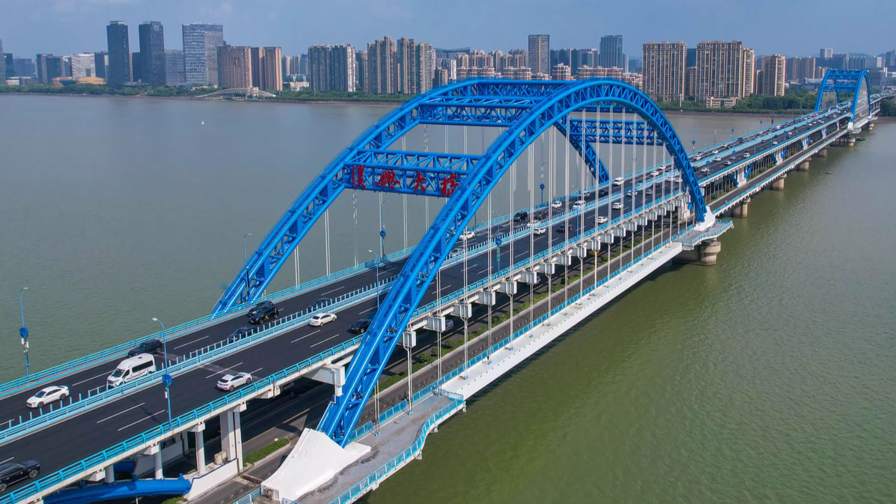Bridges are visible, tunnels are invisible, and that's what makes this one terrifyingly impressive. Beneath one of China's busiest straits, engineers are drilling a 16.18-kilometer rail tunnel, with more than 11 kilometers of it underwater, linking the mainland to the island cluster at speeds up to 250 kilometers per hour. It is not just a shortcut. It is a new benchmark, replacing ferries with high-speed precision, where a single mistake could mean disaster.

The real warning to the West is not in secrecy. It is that China is quietly changing what is possible underground. But the stakes run deeper than most realize. How do you dig beneath chaos and deliver the impossible?

Every morning, ferries crowd the waters between Ningbo and Zhoushan, shuttling commuters, students, and truckloads of goods across the strait. For decades, this crossing has been a bottleneck, subject to tides, fog, and the constant threat of typhoons. Trucks line up at the docks, waiting for space on the next boat. Families plan their travel around unpredictable schedules. For the people of Zhoushan, the sea has always been both a lifeline and a barrier.

With the tunnel, that barrier begins to dissolve. The new rail link promises to shrink the journey from over an hour and a half, sometimes far longer in rough weather, to just half an hour. For a worker living on Zhoushan and employed in Ningbo's factories, this means more time at home and less spent waiting for a ferry that may or may not arrive on time. For a student, it means access to universities and opportunities on the mainland without uprooting their life. The tunnel doesn't just move people faster, it redraws the map of daily life across the islands and the coast.

This project is more than a shortcut that changes how daily commutes and regional travel work. Zhoushan's role as the world's busiest port by cargo volume adds another dimension. Freight that once crawled across bridges or waited at ferry terminals will now flow directly onto high-speed trains, joining the arteries of China's national rail network. The result is a tighter web of commerce where seafood from island fisheries, manufactured goods, and critical supplies move seamlessly between ships and rail cars.

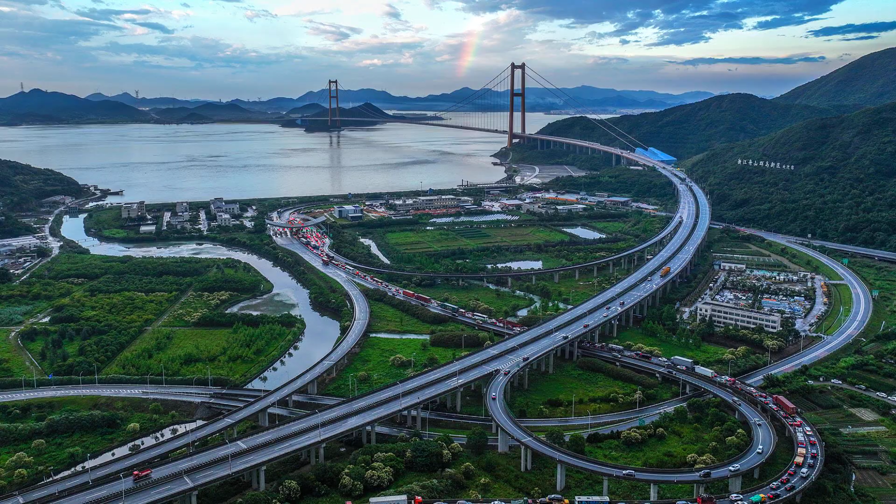The promise of integration also comes with new questions. As the tunnel prepares to open, old routines fade. Ferry operators, long the gatekeepers of the strait, face an uncertain future. The rhythm of island life will change, as will the pressure on local infrastructure and resources. The payoff is real, but so are the risks that come with building beneath one of the busiest and most unpredictable waterways in China. The next challenge lies not in the promise of speed, but in the realities of the sea and the shifting ground below.

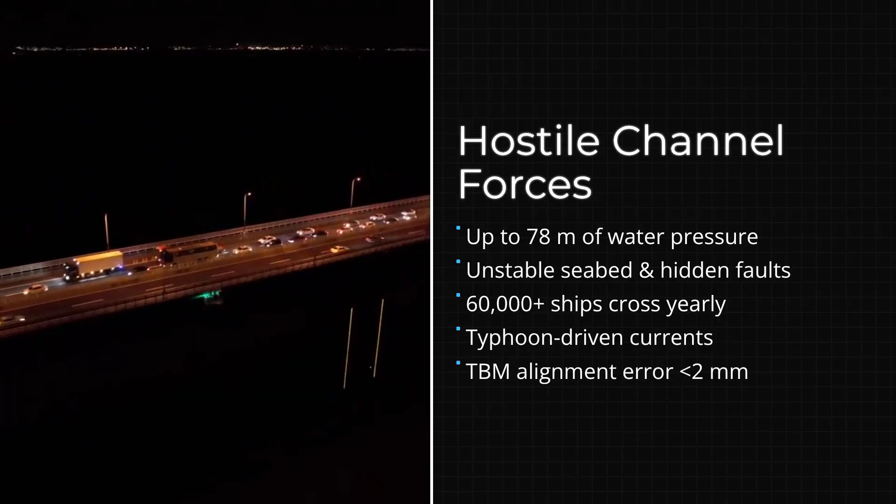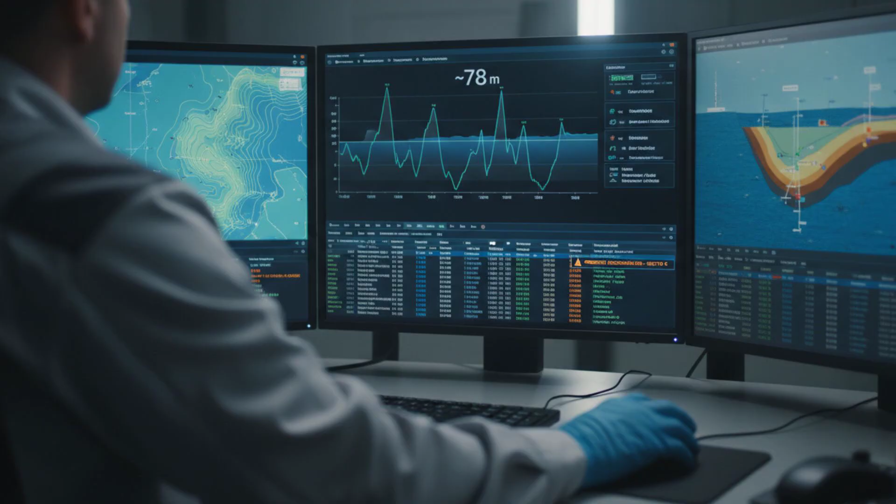Beneath the crowded surface of the Jintang Channel, a different world waits, shaped by relentless pressure, shifting geology, and the ceaseless movement of ships overhead. This is not a gentle seabed. At its deepest, the tunnel will lie nearly 78 meters below the waterline, buried in a zone where the weight of the sea above pushes down with a force that would crush a submarine hull in seconds. Every meter deeper multiplies the risk as hydrostatic pressure climbs and the margin for error disappears.

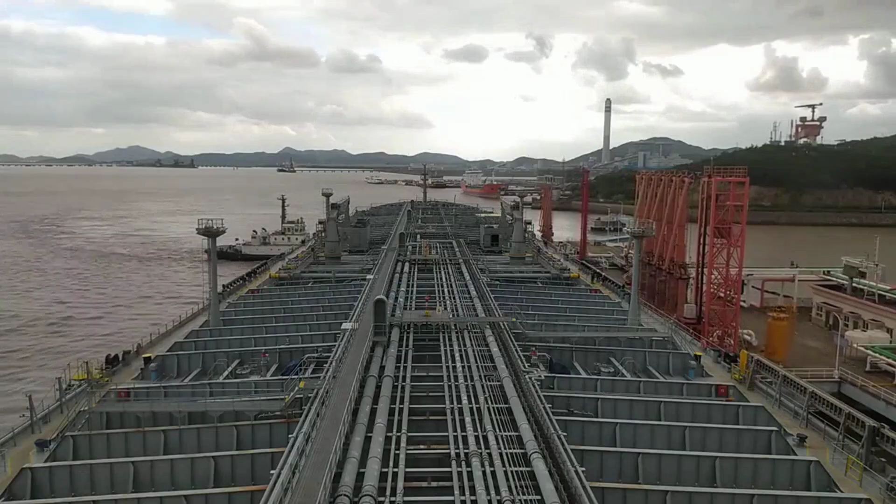The channel itself is a living obstacle. Cargo vessels, tankers, and fishing fleets cross these waters day and night, feeding the world's busiest port just a few kilometers away. There is no pause in the traffic. The tunnel route must pass beneath this marine highway without disturbing navigation, threading a path through a gauntlet of oil pipelines, seawalls, and dock foundations. Above, radar screens track hundreds of ships at once.

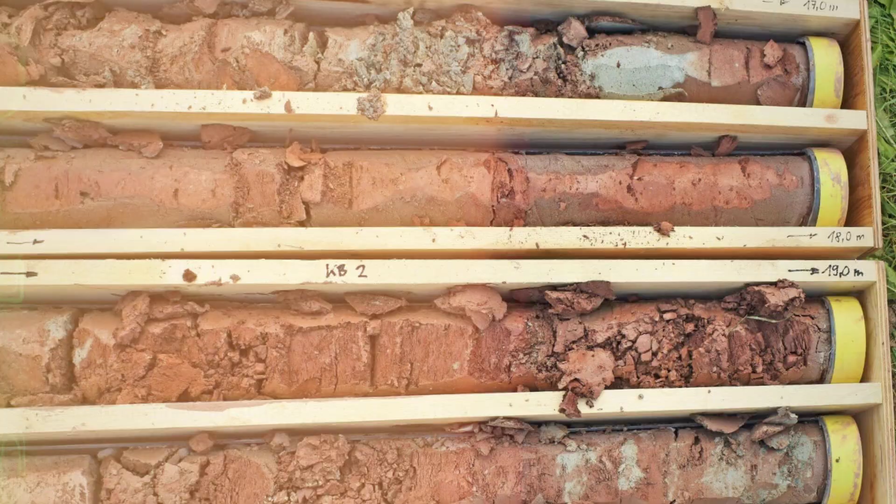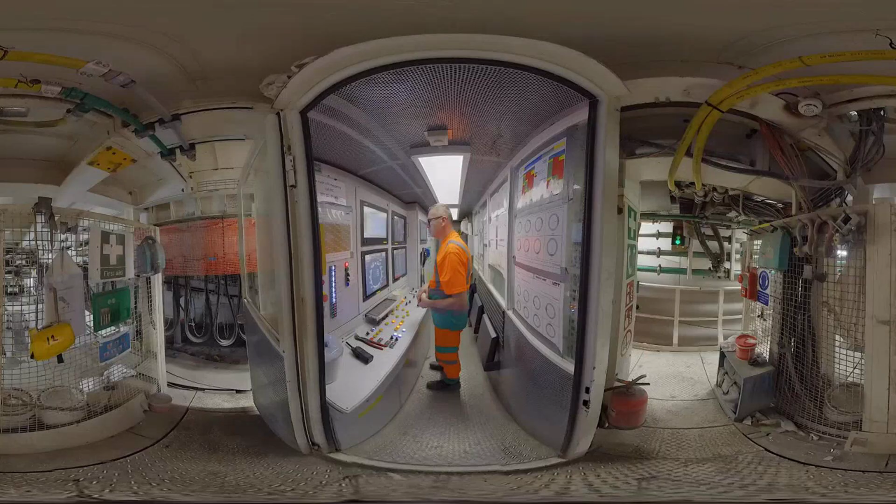Below, engineers must predict every movement of the ground. The geology under the channel is a patchwork of contradictions. In some stretches, the tunnel faces soft, silty clay, so unstable it shifts under its own weight like wet rice cake. In others, it slams into hard volcanic tuff, dense enough to spark against steel. The transition between these layers can happen in the space of a few meters, forcing the tunnel boring machines to adapt instantly, or risk getting stuck, flooding, or worse.

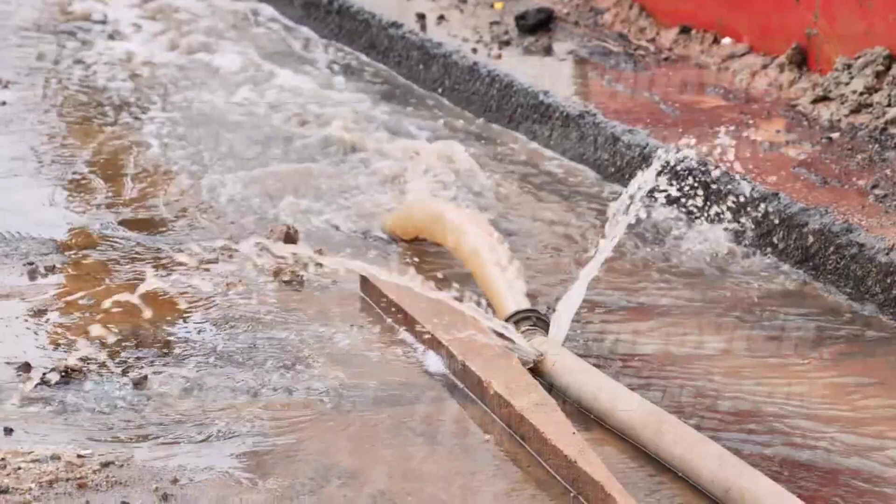28 different strata lie in the tunnel's path, each with its own hazards. Some zones are riddled with ancient channels that leak water at high pressure. Others hide pockets of gas or fractured rock that can collapse without warning. Every advance of the cutter head sends sensors into overdrive, measuring ground movement, water inflow, and the stress on the machine's shield. The margin for error is razor thin.

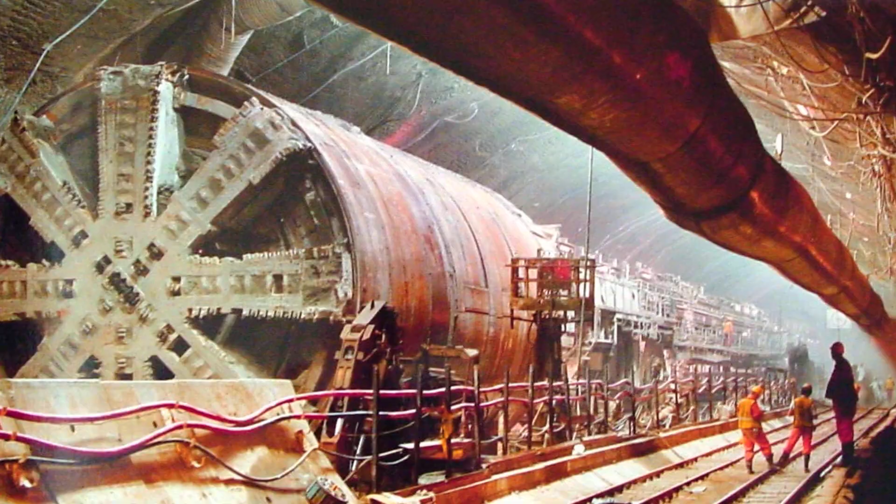Even a minor miscalculation could send water surging into the tunnel or cause the ground above to settle, disrupting shipping lanes and threatening the safety of both workers and vessels. The tunnel boring machines crawl forward in this environment, their progress measured in centimeters, not kilometers. In this place, the tunnel is not just a line drawn on a map. It is a contest with the sea, the ground, and the unpredictable forces that rule the space between.

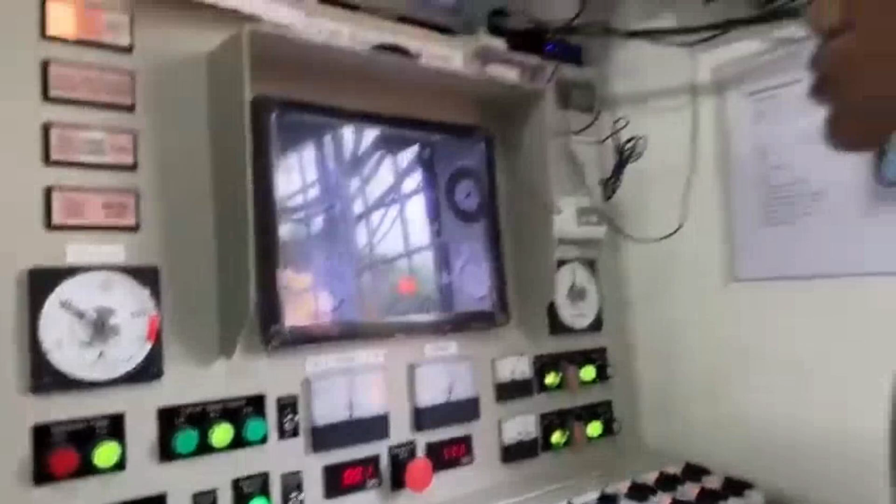The environment here is not passive. It pushes back at every turn, demanding precision and vigilance. This is the test that will define whether the promise of a seamless mainland-island connection can survive the realities of the channel below. Deep beneath the Jintang Channel, the heart of this project beats with steel and hydraulics.

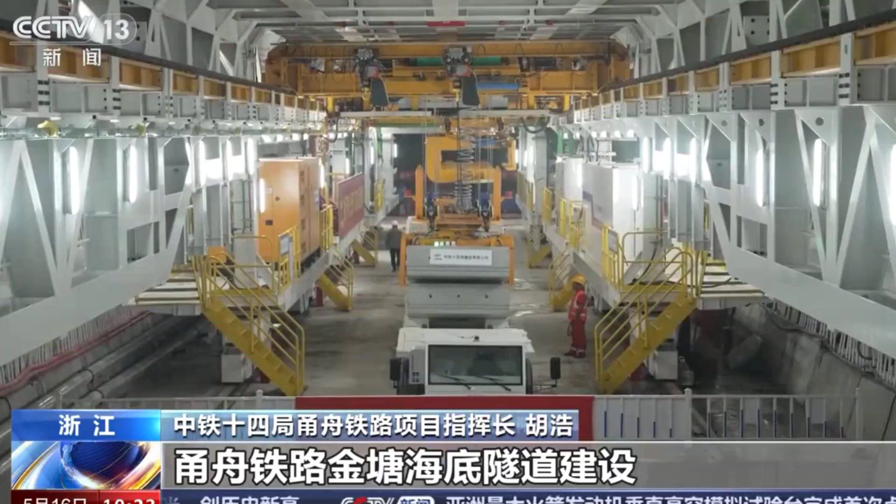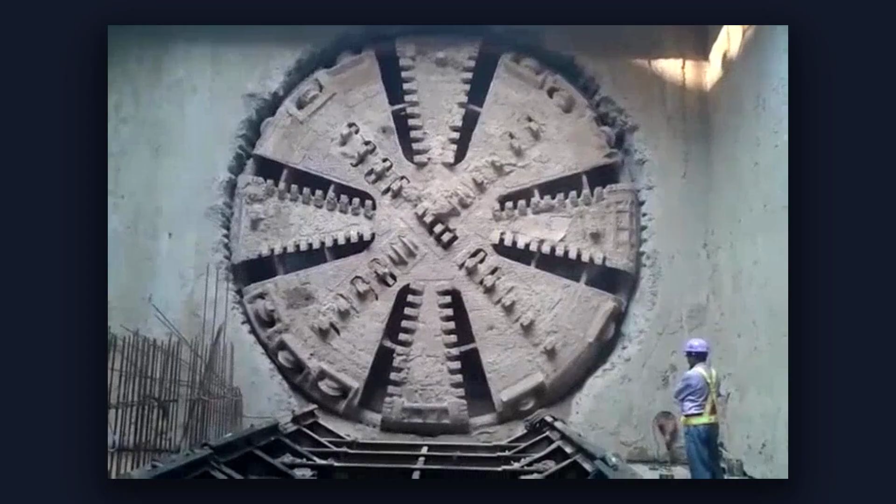Tunnel boring machines, each longer than a city block, grind forward against the pressure of the sea above and the unpredictable ground below. These are not off-the-shelf machines. The tunnel boring machines driving this tunnel are named Yongzhou and Dinghai. They were built to order, their cutter heads bristling with hundreds of custom-designed discs.

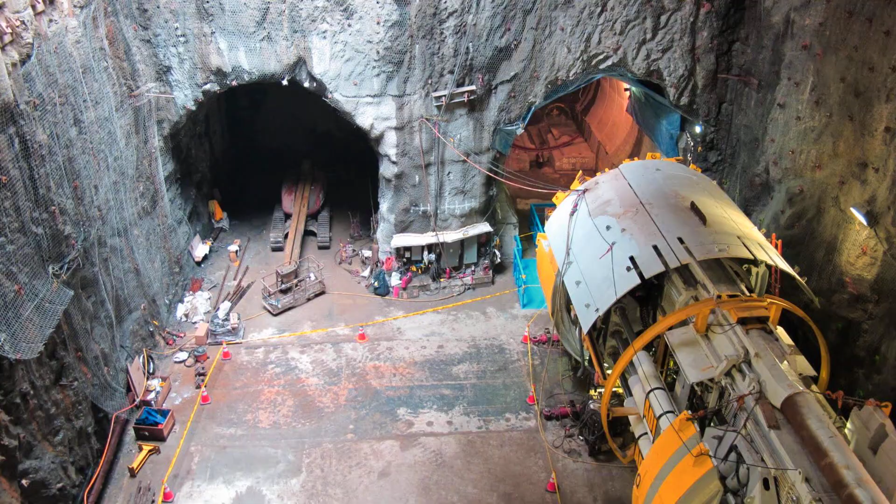Each disc is chosen for a reason. Some are built for slicing through soft, sticky clay that clings like wet dough, while others are forged to shatter volcanic rock hard enough to spark against steel. The cutter head itself is a rotating wall of teeth and sensors, monitoring wear and alerting crews the moment a disc needs to be swapped.

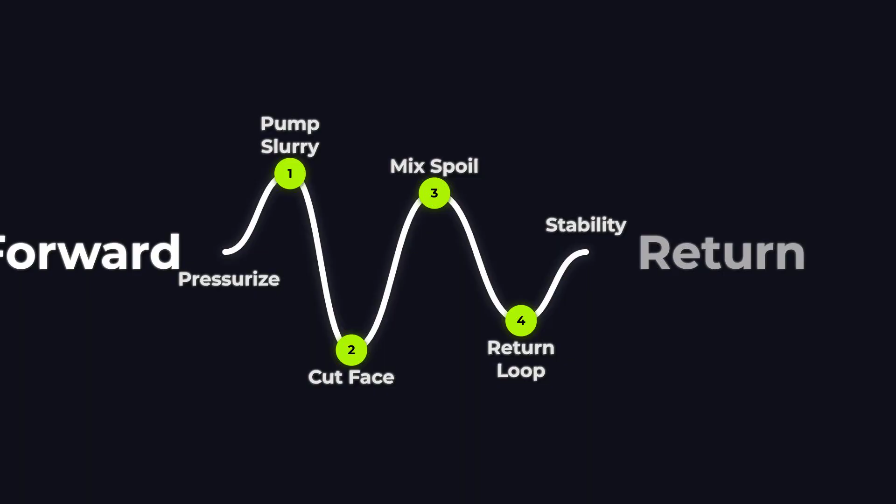Swapping a disc in this environment is not a simple task. The cutter head sits under immense pressure, with the sea pressing in from all sides. To keep the tunnel face stable, the machine uses a slurry shield system, a closed loop that pumps a thick engineered mud to the front, balancing water pressure and carrying away crushed rock.

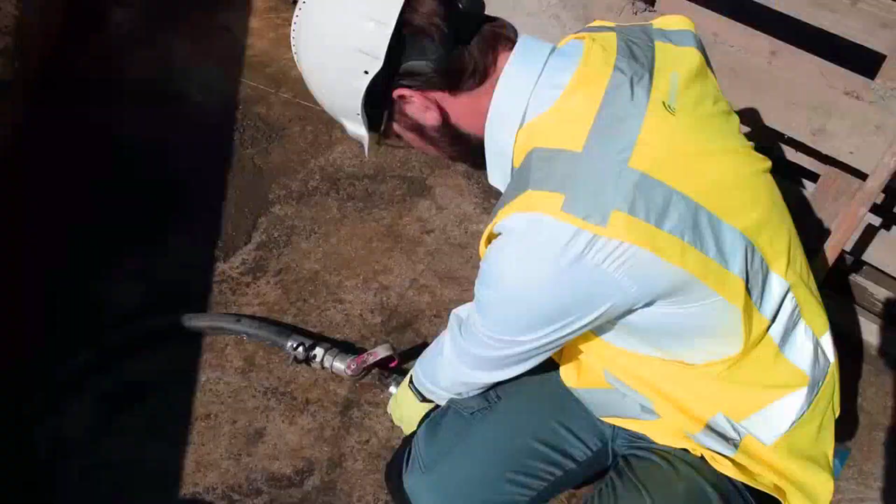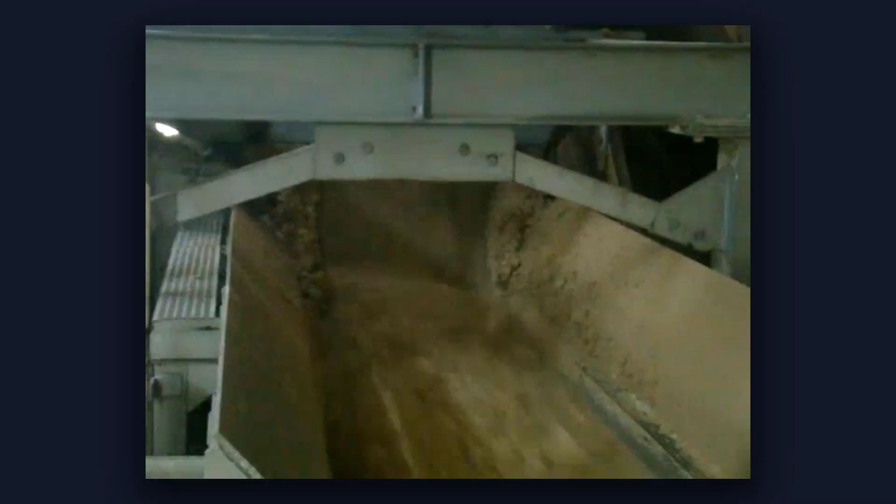This slurry must be carefully managed. Too little pressure and water could burst in, flooding the machine. Too much pressure, and the ground above could heave, disturbing the busy shipping lanes overhead. Operators monitor gauges and flow rates in real time, adjusting valves and pumps to keep the balance perfect. Spoil, which is the broken rock and soil, travels back through pipelines, snaking out of the tunnel to barges waiting at the port. Every advance is measured in precise steps.

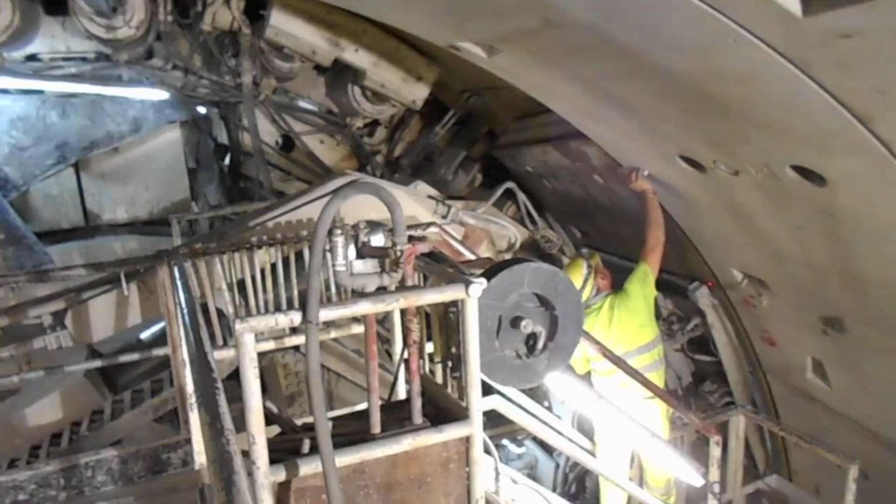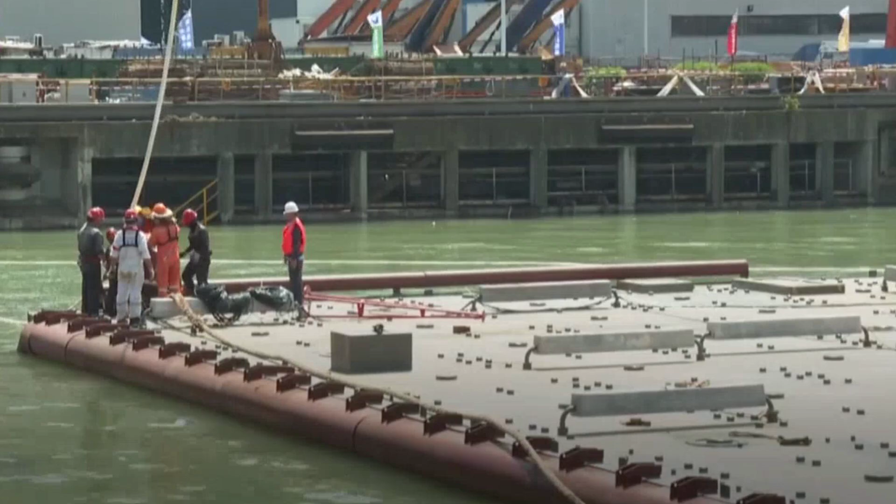As the machine chews forward, it pauses for crews to install giant concrete rings, precast segments that line the tunnel and lock together like pieces of an enormous puzzle. These segments arrive just in time, delivered from factories by barge and truck, lifted by overhead cranes, and slotted into place by crews working in shifts around the clock.

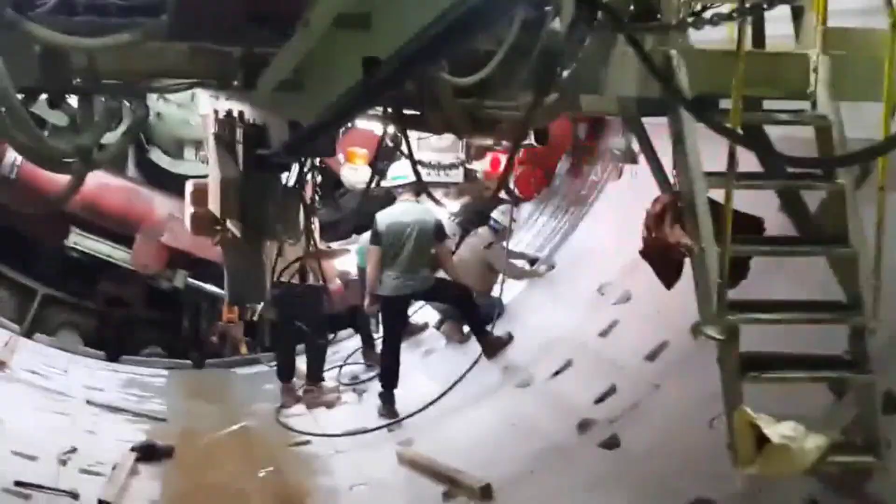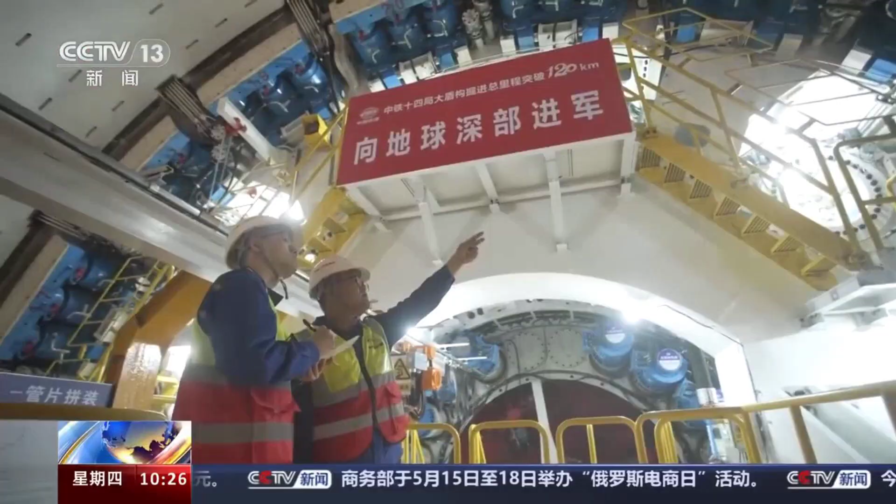The logistics are relentless. Each ring must be perfectly aligned, not just for the train tracks that will come later, but to keep the tunnel watertight and stable as the machine pushes deeper. If a segment is even slightly off, the entire operation slows and the risk of leaks or settlement grows.

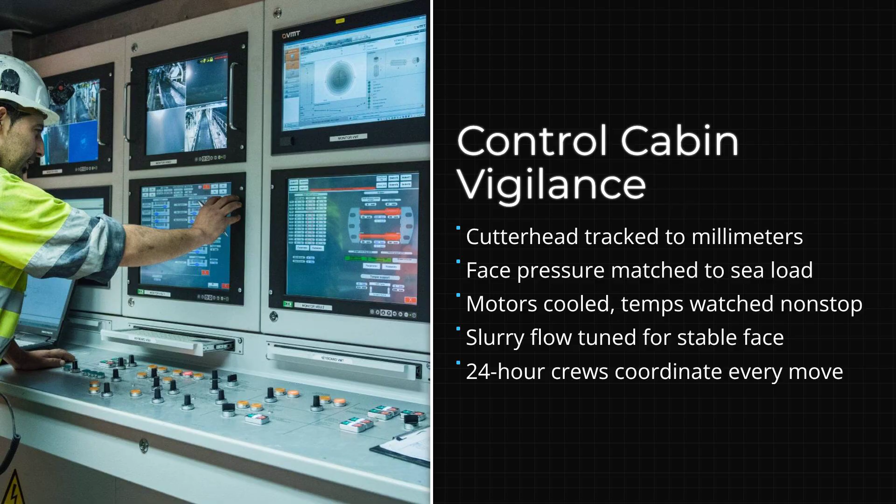Inside the tunnel boring machine, the atmosphere is tense but methodical. Operators sit in command cabins surrounded by screens, tracking the position of the cutter head, the pressure at the face, the temperature of the motors, and the flow of slurry. Maintenance crews stand ready to enter the pressurized chamber when a cutter needs replacement, donning special suits and working against the clock.

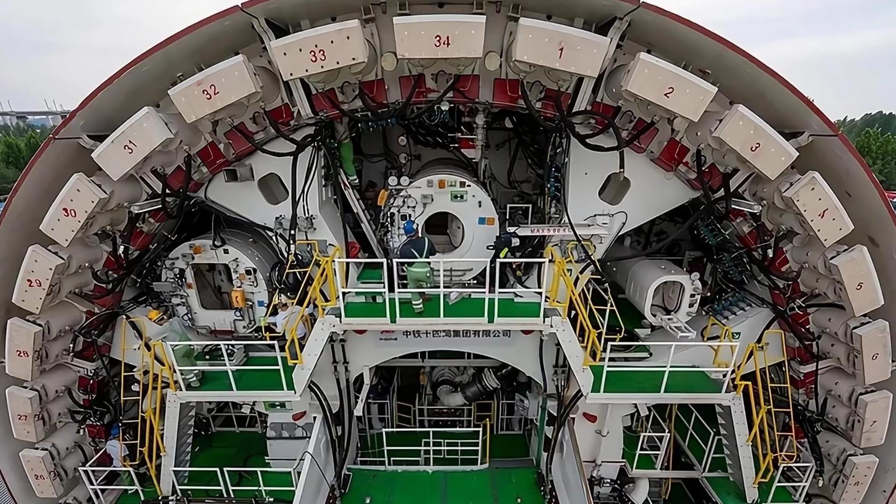Each intervention is planned and rehearsed because any mistake could let in water or destabilize the ground. The tunnel is a living system, and every part, cutter head, slurry loop, segment ring, logistics chain, must work in harmony. This is where customization matters most.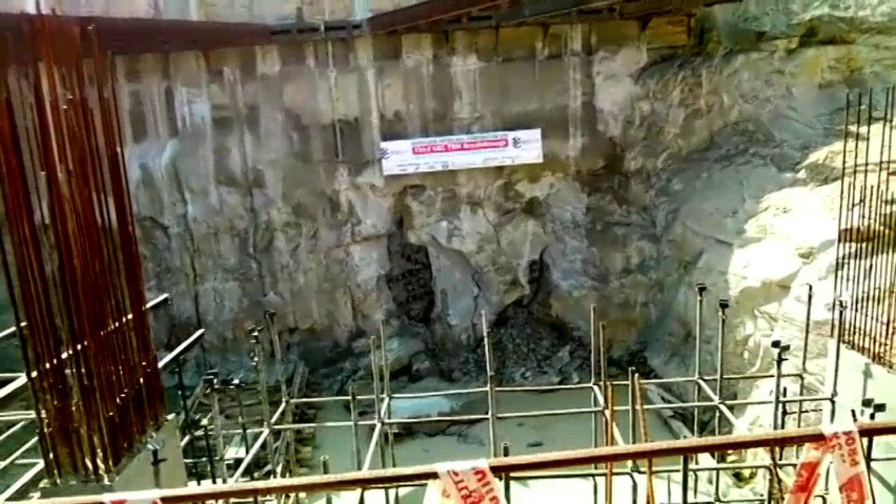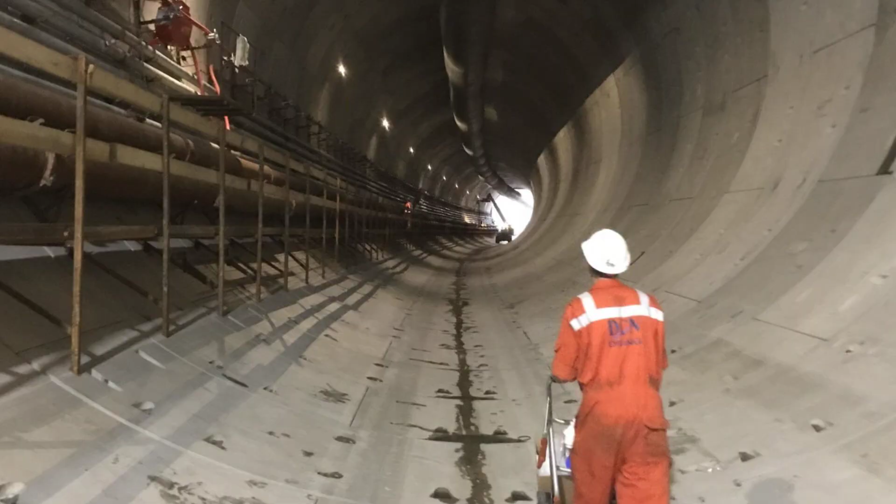The machines are tailored for the Jintang Channel's unique geology, built to handle sudden transitions from soft silt to fractured rock, and equipped with intelligent monitoring that can sense trouble before it becomes disaster. For the crews inside, every meter gained is a small victory against the sea. The risks are real, but so is the sense of purpose. Each shift brings them closer to the moment when the two machines will meet deep below the strait, in a feat of precision few have ever attempted.

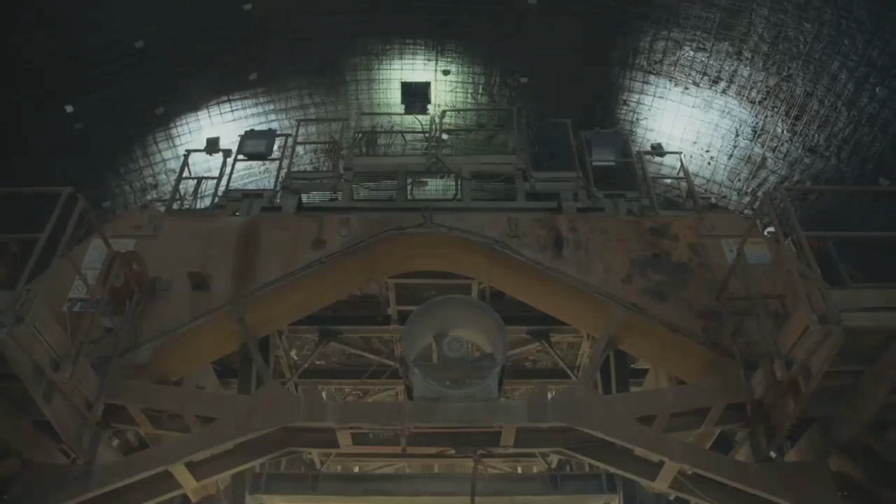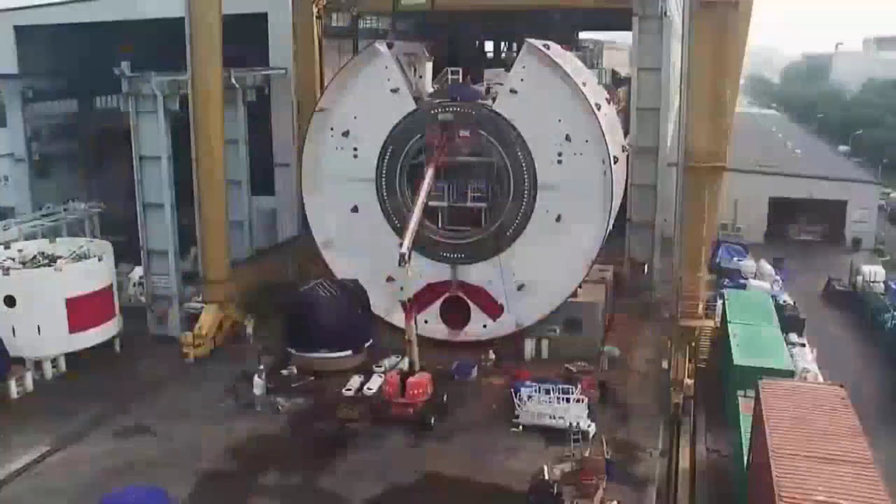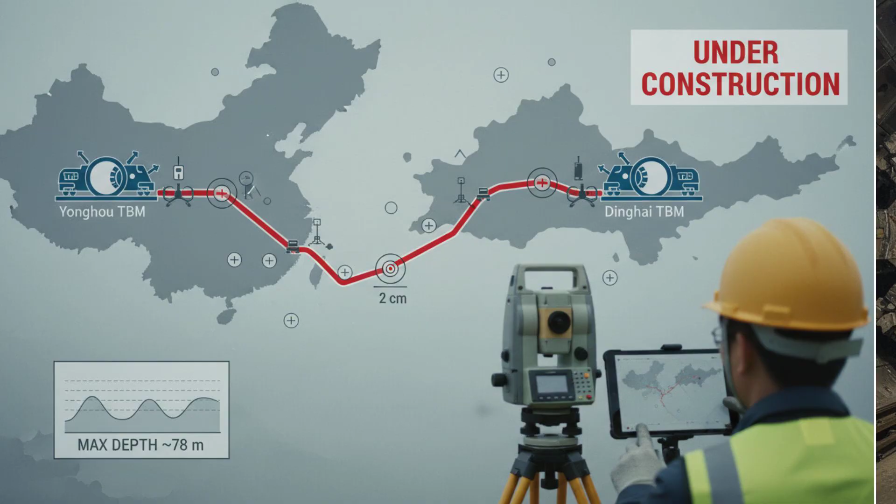Deep inside the tunnel, the difference between triumph and disaster is measured in millimeters. The two giant tunnel boring machines, Yonghou driving from Ningbo, Dinghai from Zhoushan, are not simply digging toward each other. They are locked in a high-stakes exercise in alignment, where the margin for error is smaller than the width of a finger. Every meter advanced under the Jintang Channel brings the machines closer to a meeting point set with a tolerance of just 2 centimeters.

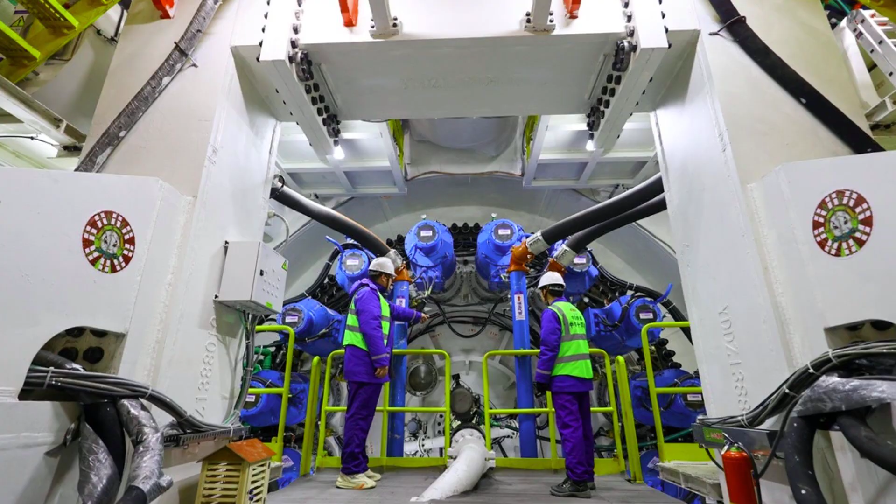That level of precision, under nearly 80 meters of seawater and through 28 unpredictable layers of rock and silt, is not a matter of luck. It is the product of a continuous feedback loop, an invisible web of measurements, corrections, and real-time decisions that starts long before the machines even touch the ground.

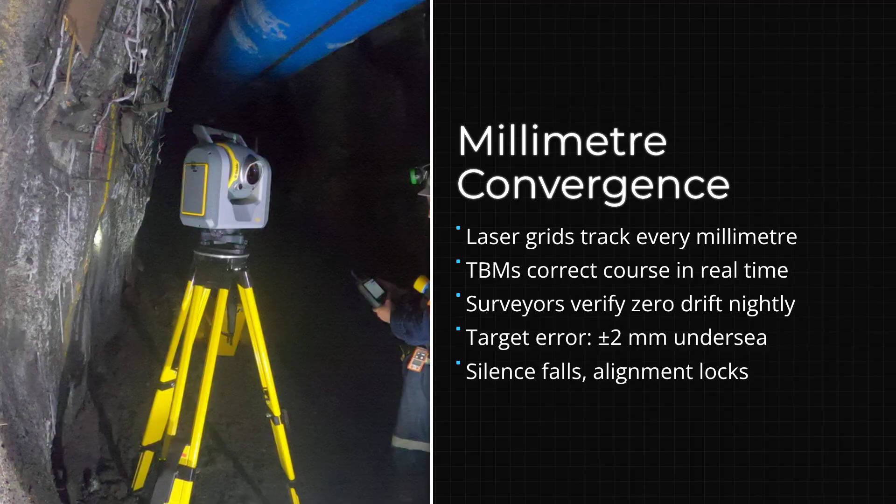The backbone of this operation is a suite of advanced surveying and navigation systems. Laser theodolites, inertial sensors, and digital control networks form a chain of reference points from the surface, down the shafts, and deep into the tunnel itself. Each segment of the tunnel is mapped and checked, then checked again. As the cutter head pushes forward, sensors track its position in 3 dimensions, correcting for drift, vibration, and the subtle shifts of the ground. Any deviation is flagged instantly.

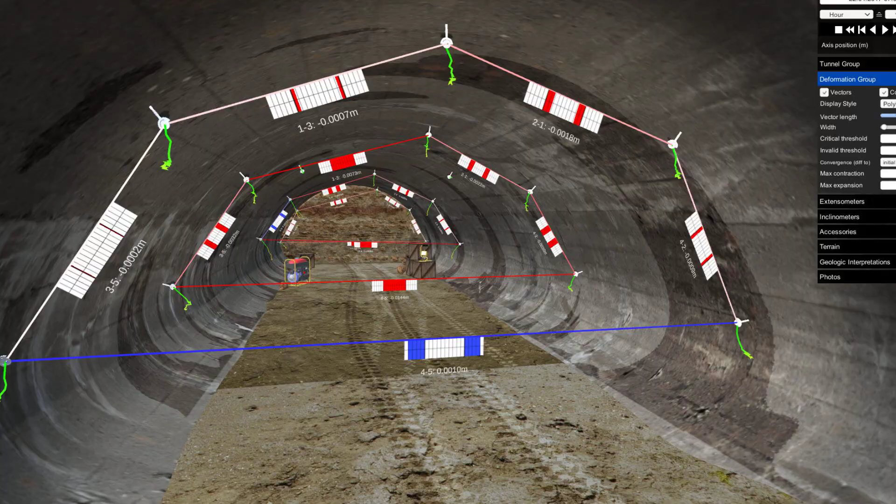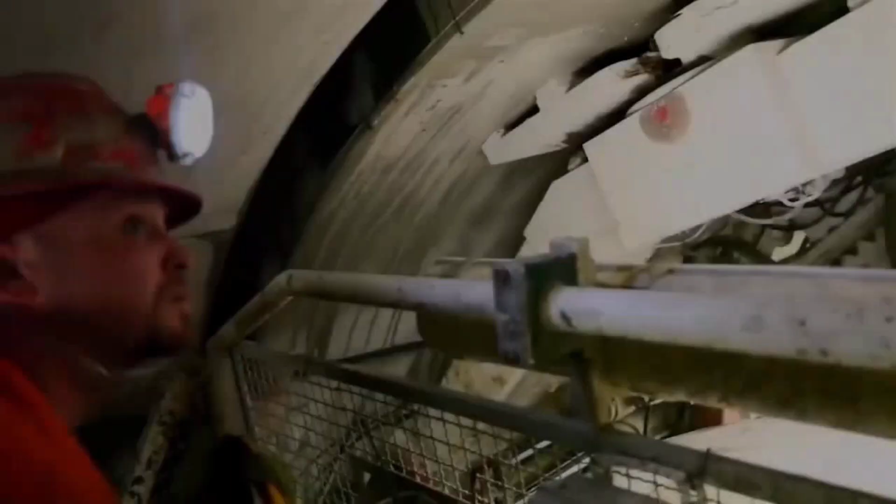Operators in the command room watch a constant stream of data, angles, distances, and pressure readings, comparing the live position of the machine against a digital model of the planned route. If the machine strays even a few millimeters, automated controls make micro-adjustments, steering the cutter head back on course. Every ring of concrete installed behind the machine is surveyed, its position logged and compared to the design, ensuring that the tunnel remains true from end to end.

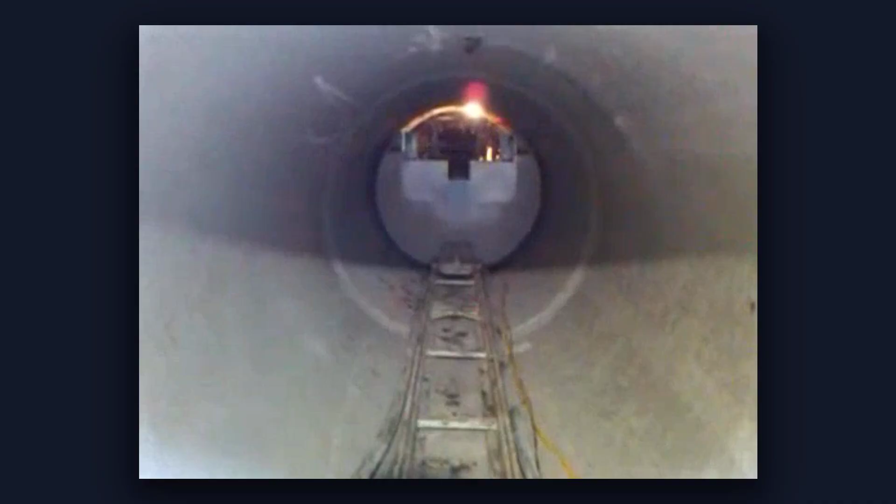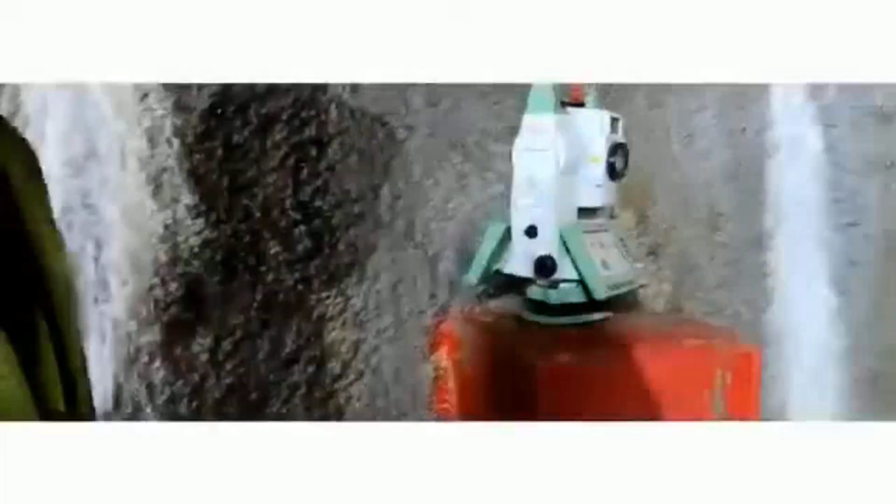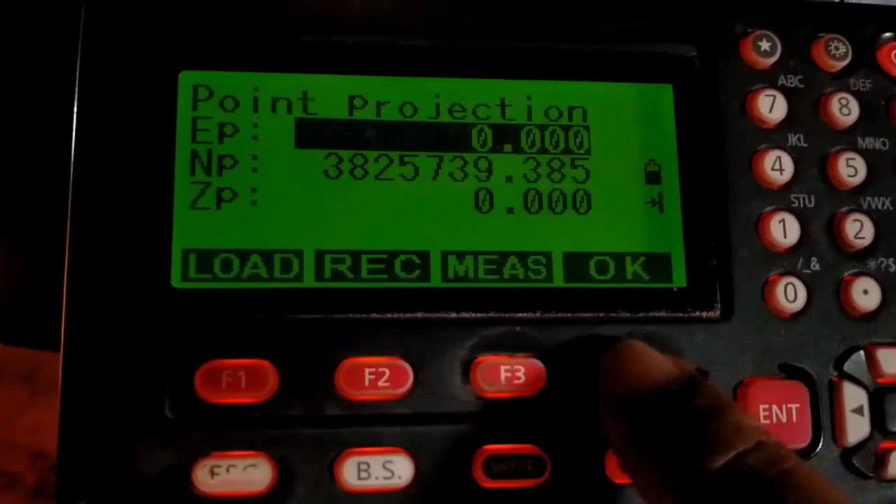This is not just about high-tech sensors or clever software. It is about discipline and routine. Before each shift, crews calibrate their instruments, running checks with laser targets and reference prisms. Survey teams move in behind the machine, setting up temporary benchmarks and cross-checking measurements by hand. The process repeats, hour after hour, day after day, until the tunnel becomes a single continuous line, straight, level, and true.

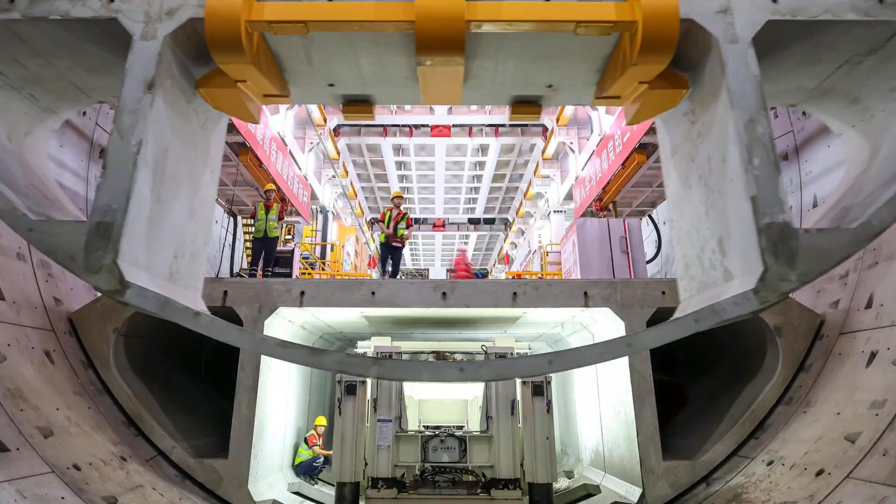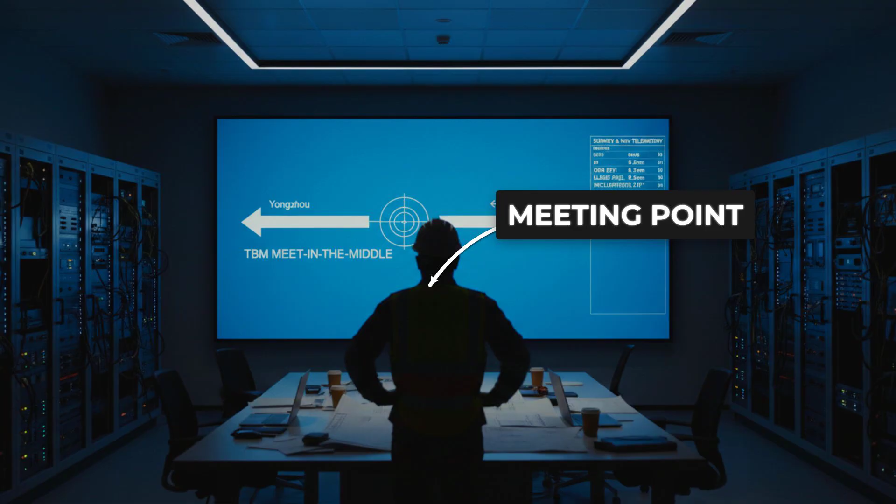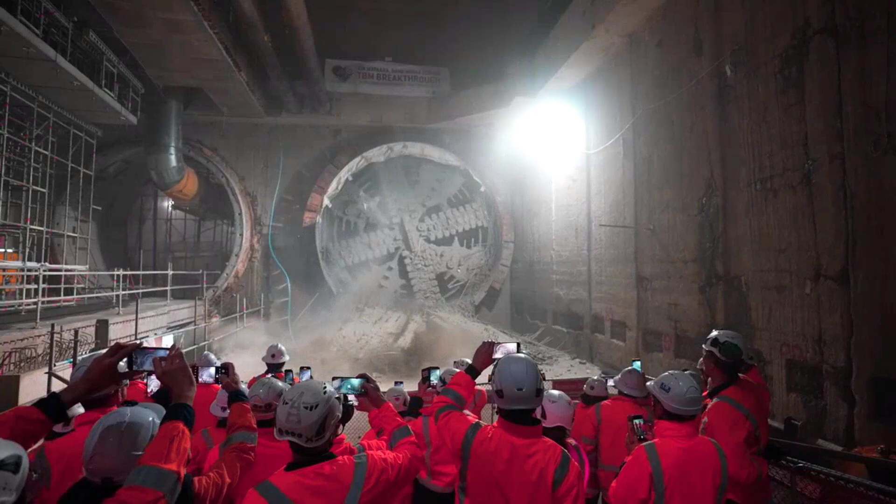When the two machines close in on each other, the tension in the command room is palpable. On the screens, a simple diagram shows 2 arrows converging on a tiny circle, the target zone where the cutter heads must meet. As the distance narrows, the margin for error shrinks. In the final meters, progress slows to a crawl. Operators scrutinize every data point, ready to halt the advance if the numbers slip outside the tightest tolerances.

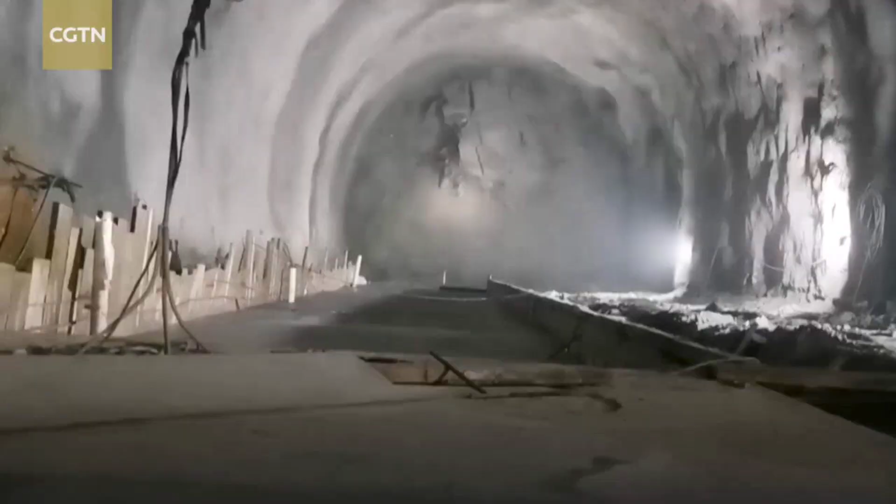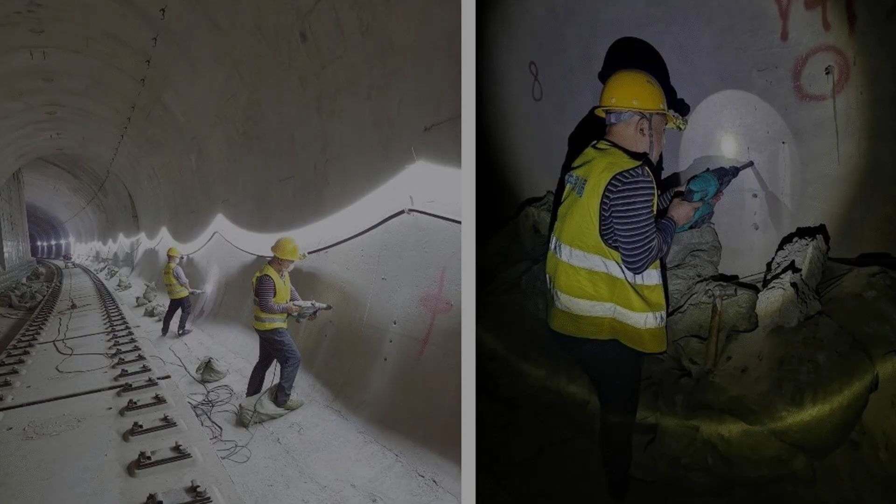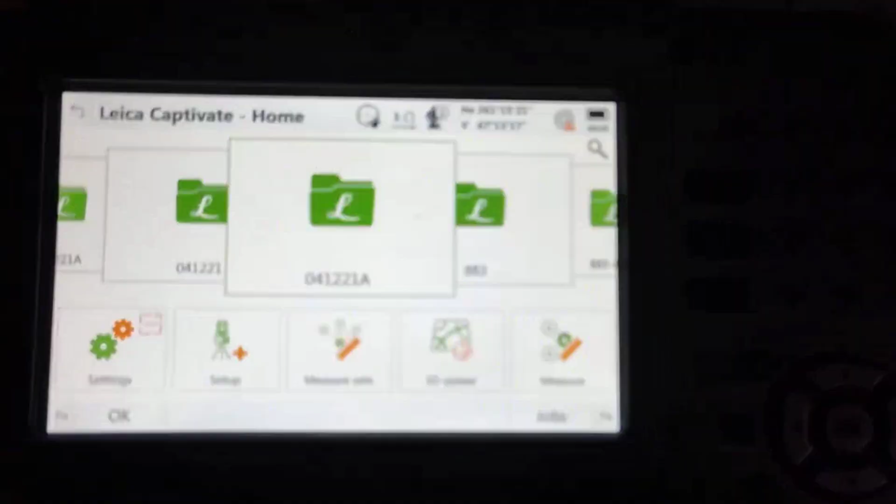The breakthrough, when it comes, is almost anticlimactic. After months of calculation, drilling, and adjustment, the two machines finally meet beneath the seabed. The measured deviation is less than 2 centimeters, verified by independent survey teams. In some reports, the vertical error is just 2 millimeters, with no measurable horizontal offset at all. For the engineers, this is the proof that extreme accuracy is not only possible, but repeatable, even in one of the world's most hostile construction environments.

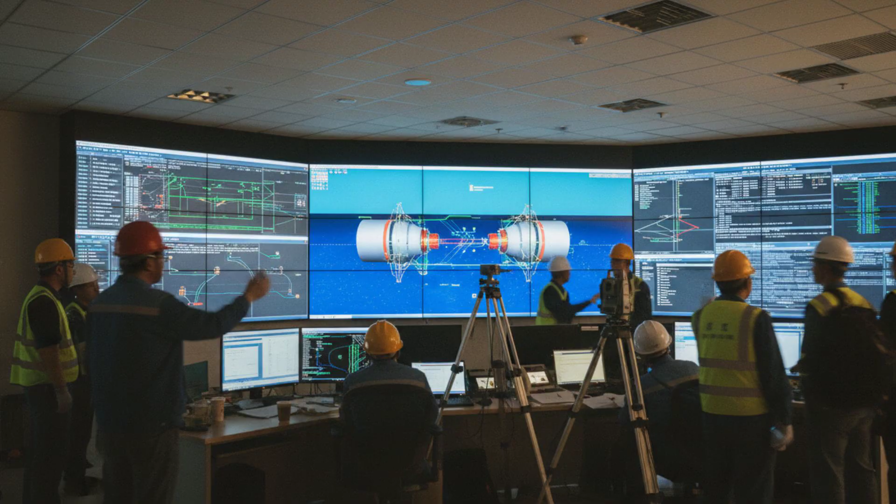The achievement is not a single moment, but the sum of thousands of corrections, a silent choreography of people and machines working in perfect alignment. In the command room, the celebration is quiet, just a new entry in the logbook, and the knowledge that the tunnel's invisible backbone holds true from shore to shore.

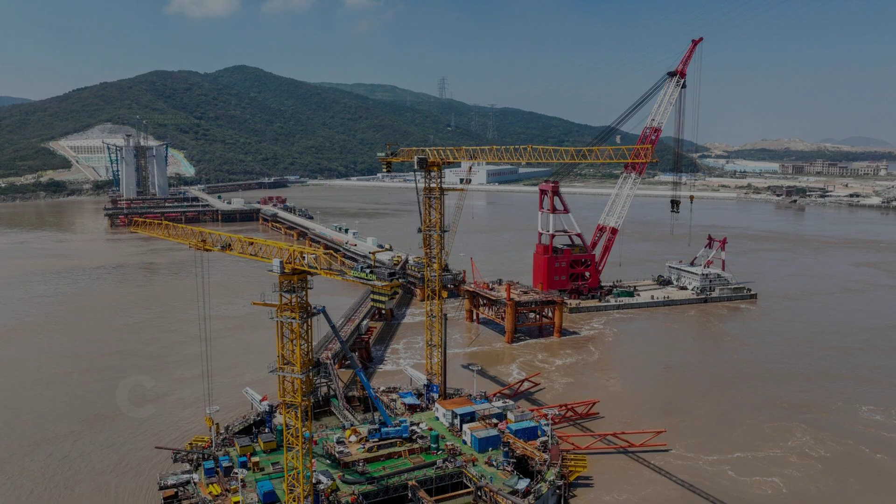Inside the Jintang Tunnel project, the real story is about orchestration on a scale that few countries can match.

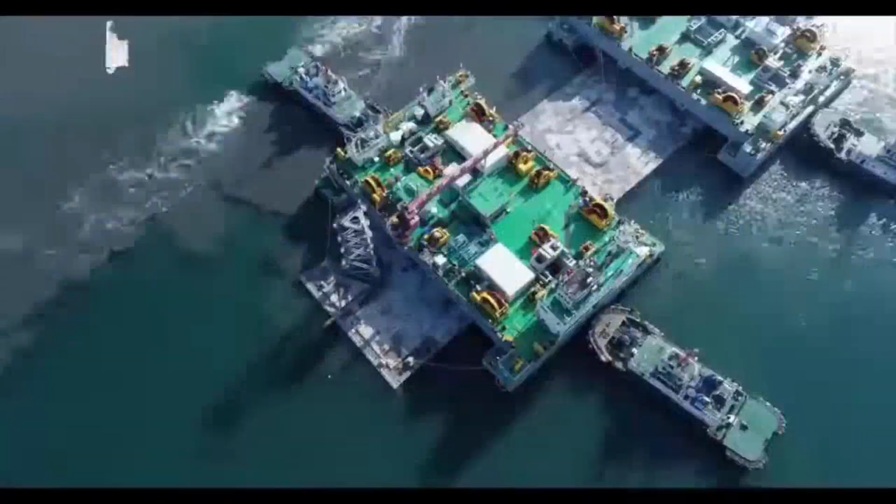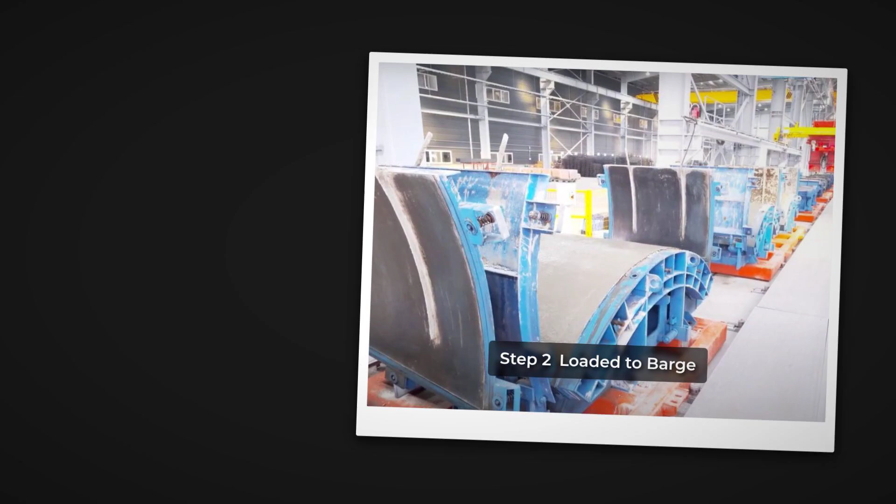Every concrete segment lining the tunnel is cast in precision-controlled factories, then shipped just in time across port facilities that already handle more cargo than anywhere else on Earth. These segments do not wait in stockpiles. They move from mold to barge to crane to tunnel face, tracked by digital systems that monitor every step.

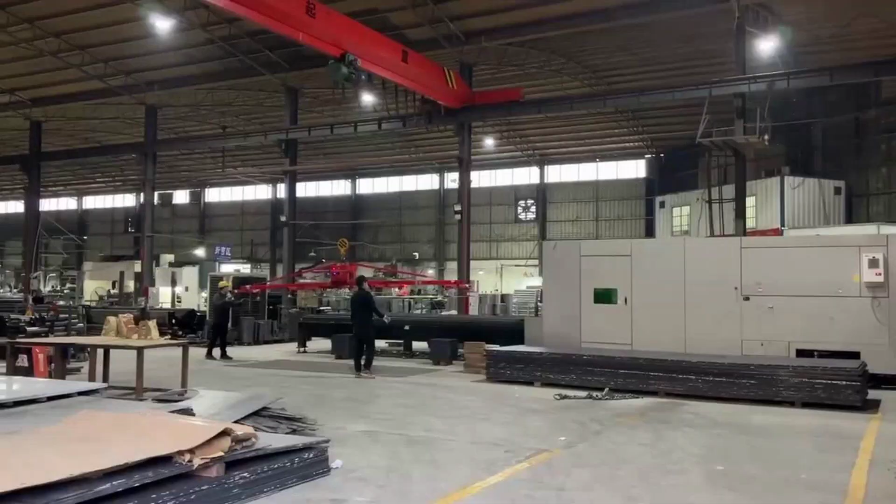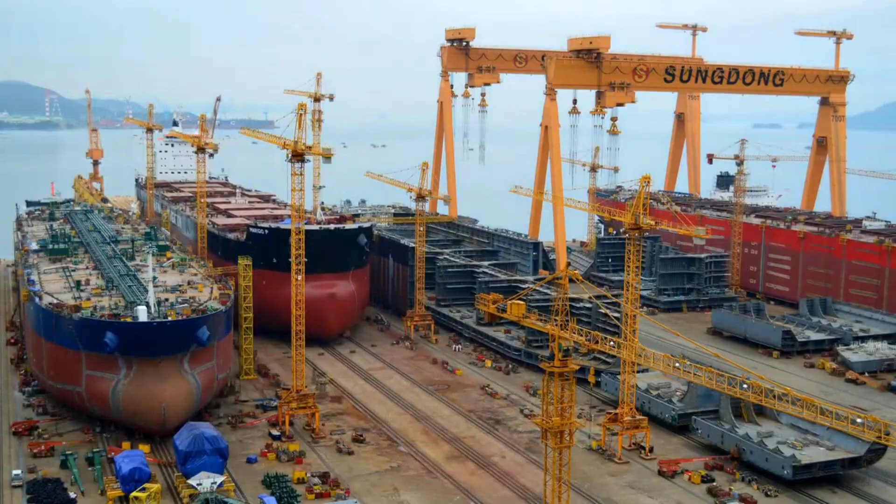The factories run on schedules set months in advance, adjusting output to match the tunnel's daily progress. If the TBM advances faster one week, the factory ramps up. If geology slows work, shipments pause automatically. This rhythm, connecting manufacturing lines to port logistics and on-site assembly, is what lets crews keep pushing forward without costly delays. Quality is never left to chance.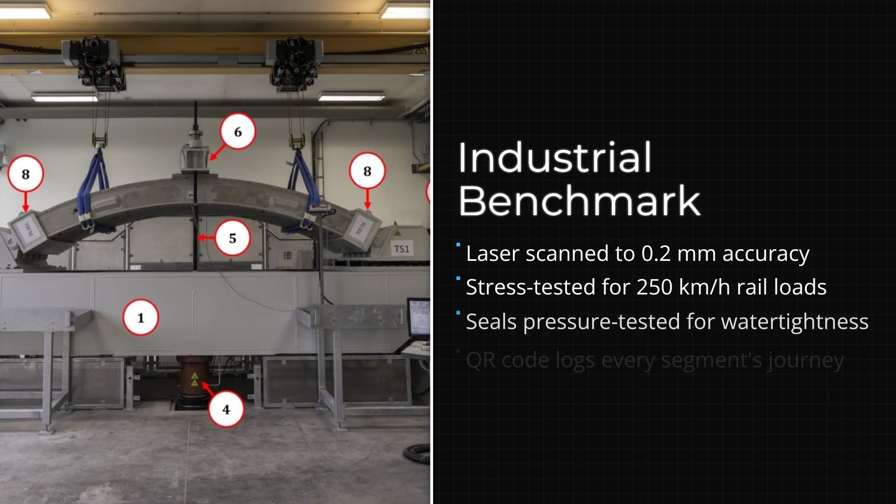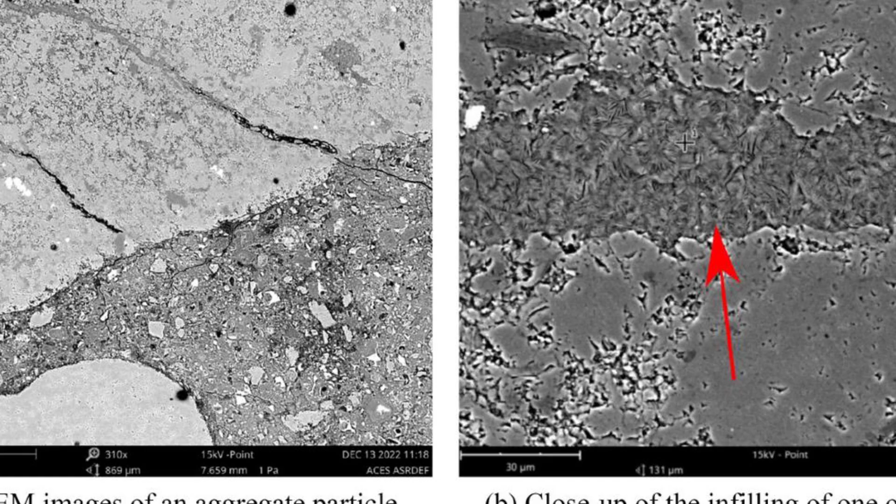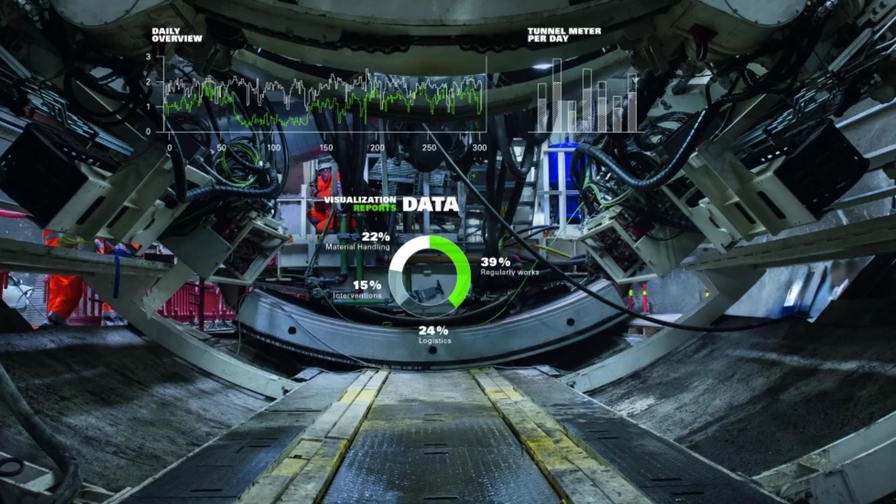Each ring segment is checked for dimensions, strength, and water tightness before it even leaves the factory floor. Barcode scanners log every piece, linking it to a digital record that follows it underground. If a problem ever surfaces, for example a micro crack or a misaligned joint, engineers can trace the segment's entire history, from the batch of concrete to the day it was poured. This level of traceability is standard here, not an exception. It is the backbone of a system where mistakes are caught early, and corrections ripple through the supply chain instantly.

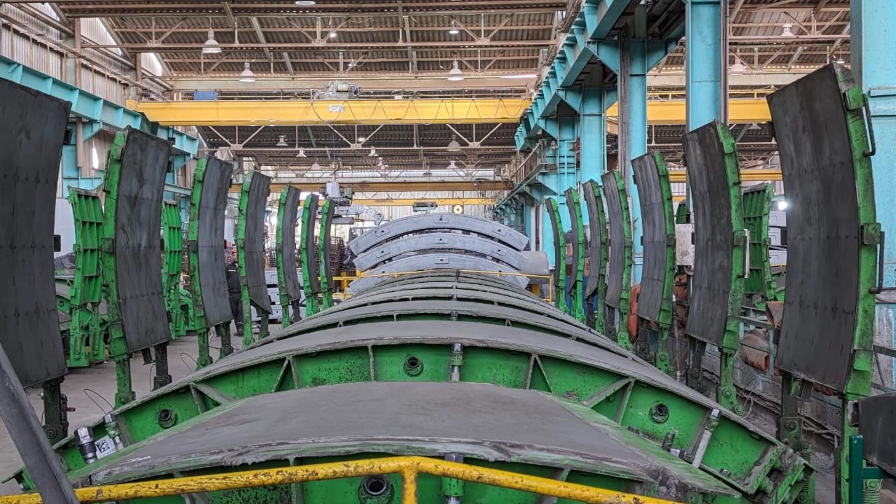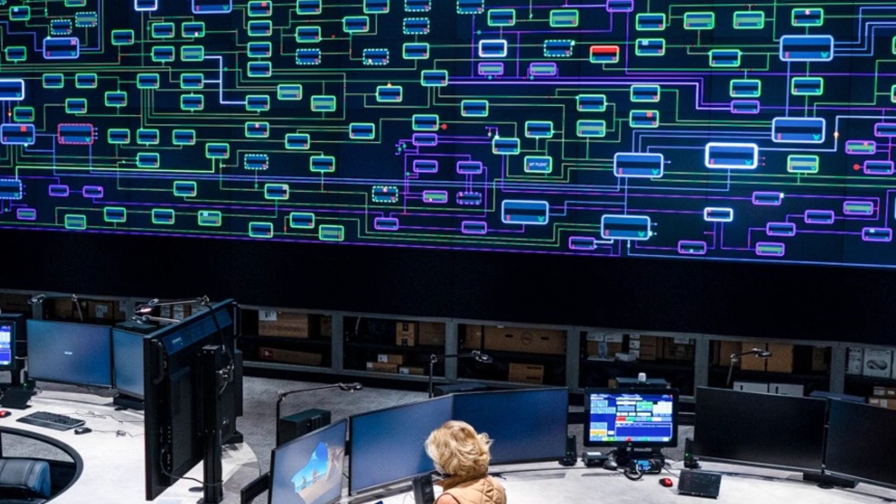The warning to the world is not about the tunnel's depth or the speed of the trains. It is about the machinery behind the scenes, the factories, ports, and logistics teams moving in lockstep, guided by engineers who treat the project as a living system. This is not just construction, it is industrial choreography. The lesson is clear: when every part of the process is integrated and responsive, the limits of what can be built begin to shift.

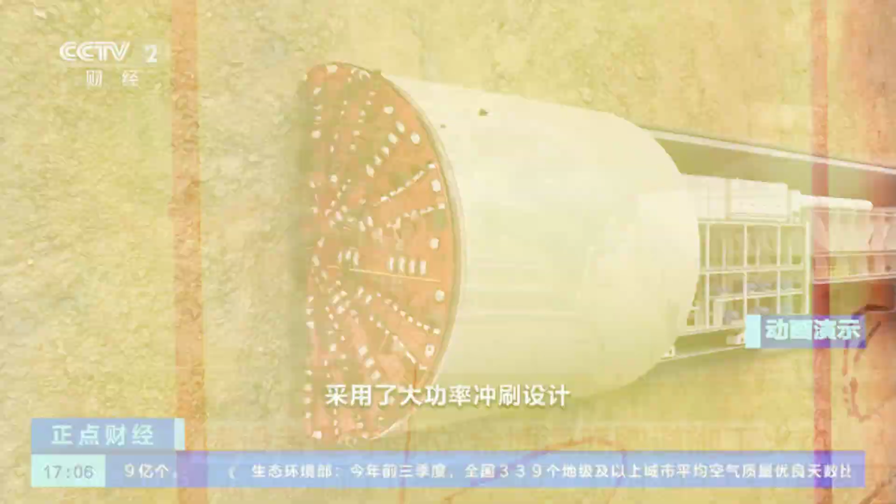Every undersea mega project leaves a mark, and the Jintang Tunnel is no exception. Excavation beneath the channel stirs up layers of sediment that have been settled for centuries. As the tunnel boring machines advance, the slurry shield method keeps water at bay, but also risks releasing plumes of fine particles into the surrounding sea. These clouds can drift with the currents, sometimes spreading beyond the immediate construction zone.

Fisheries and marine habitats, already under pressure from shipping and port activity, face new uncertainty as the balance shifts. Environmental monitors track water quality and sediment movement, but the true impact on local ecosystems may not be clear for years. On land, the story is just as complicated.

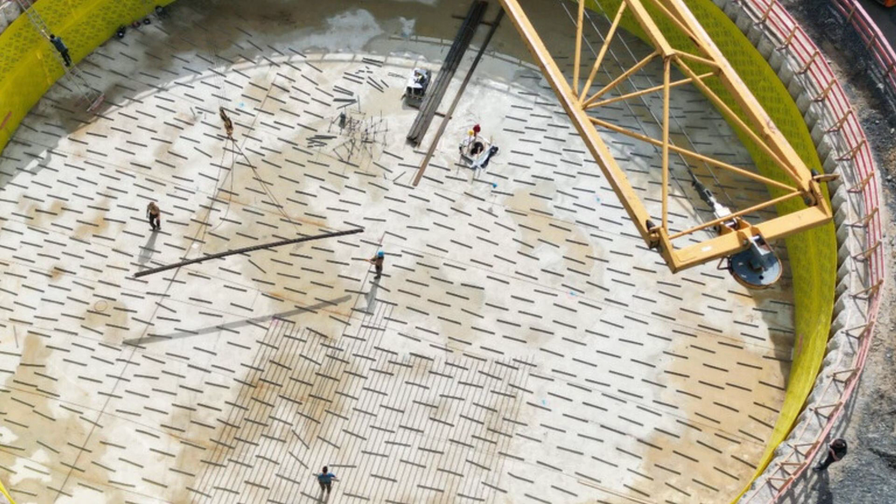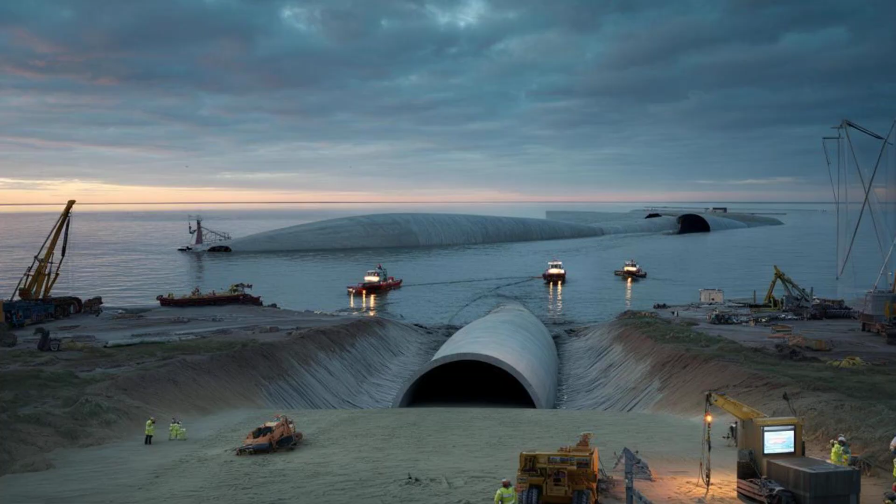Construction sites near docks and neighborhoods bring noise, dust, and traffic. Temporary land use for shafts and segment yards reshapes familiar spaces, while the constant flow of materials and workers strains local infrastructure. Some disruptions fade quickly, others linger, changing the rhythm of daily life. Yet for many, the promise of faster connections and new opportunities outweighs the inconvenience. Communities adapt, but the disruption is real.

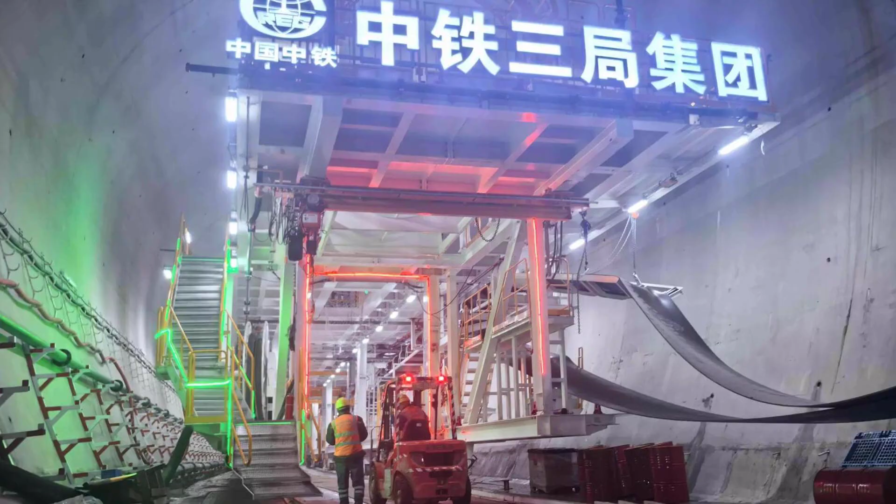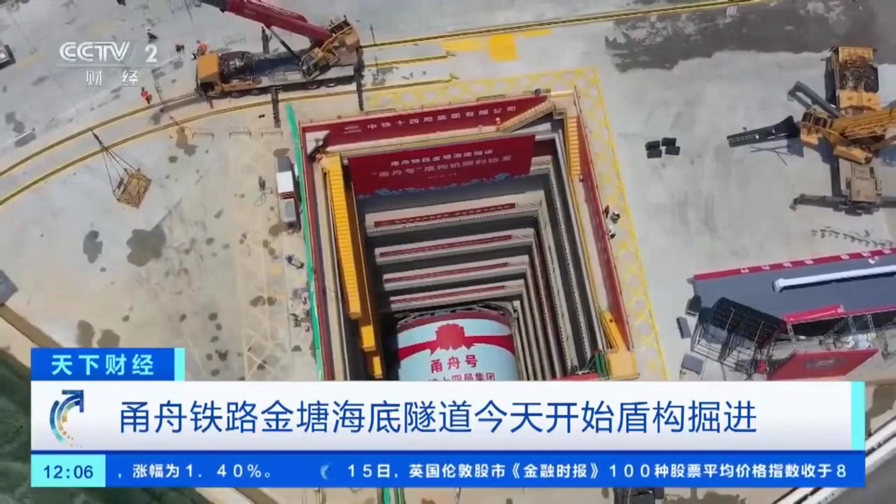Beyond the immediate horizon, some commentators look to the Jintang Tunnel as a sign of what is possible. They speculate about even longer crossings, such as a future link beneath the Taiwan Strait, and they point to Jintang as proof that the technical barriers are shrinking. This is speculation. For now, the tunnel beneath the Jintang Channel is a feat in its own right, and any talk of new frontiers belongs to a different chapter.

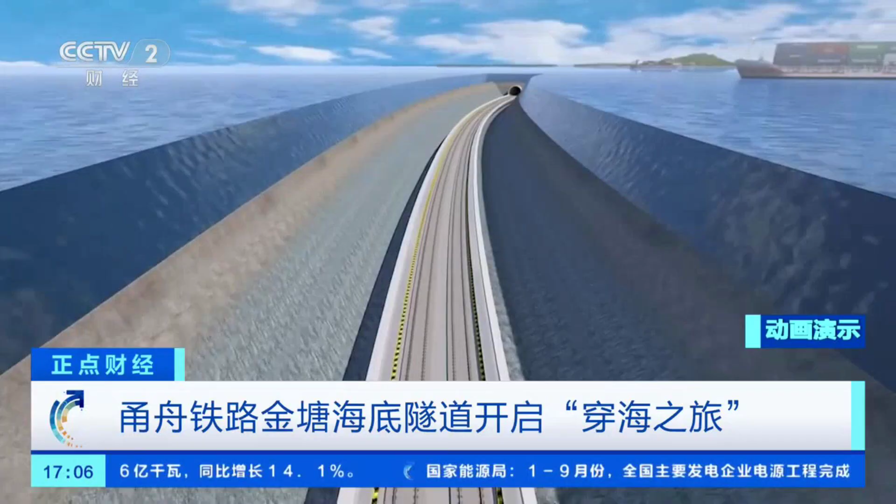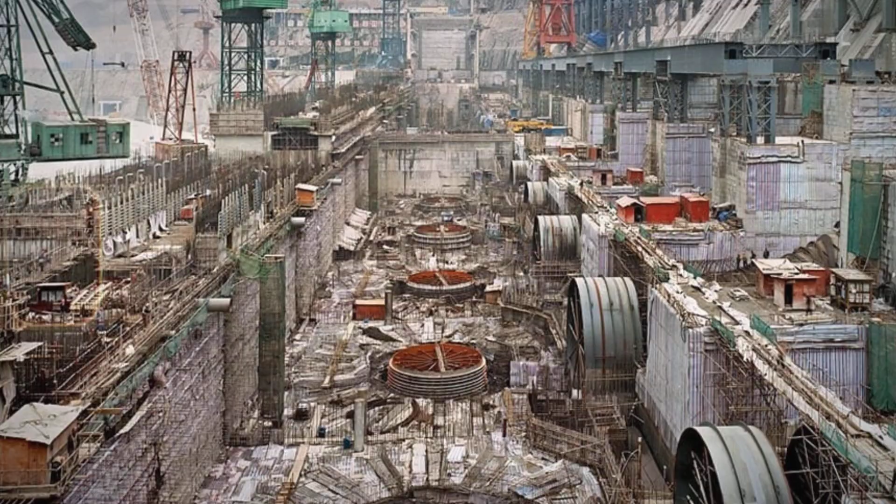Today, the world watches as China sets a new benchmark for undersea engineering, achieving sub-millimeter tunnel boring machine precision beneath 78 meters of seawater. This isn't just infrastructure. It's an industrial signal sent in real time. As mega projects grow bolder, the line between ambition and capability keeps shifting.

In the end, the future belongs to those who can build it, no matter what lies beneath. What do you think this means for global innovation?